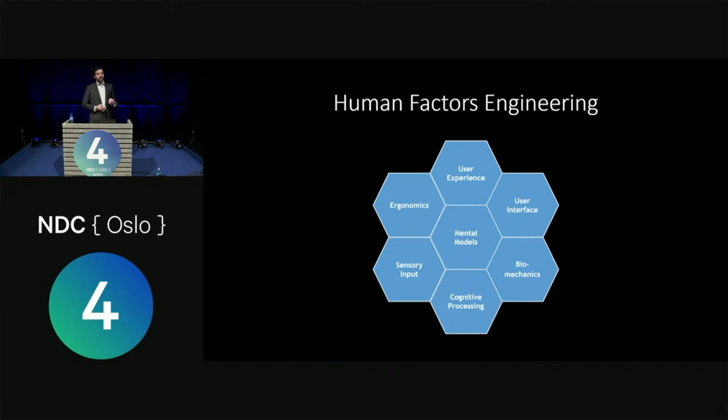Ergonomics, so how human bodies fit into technology and how you build things so that they are comfortable and don't break. And then mental models, which is really how you make sure that what is happening in your user's mind represents what is happening in the system and that they match properly. And all of this together, along with a bunch of other fields, is human factors engineering.

And I want to talk about life-critical systems. And I bring this up because I think probably a large portion of the audience here might be here because planes sound cool, and I want to hear about them and them crashing. But maybe not so aware of how this actually relates to me and what I do in my work.

And so life-critical systems, obviously anything that involves risk to human life or that keeps someone alive or could kill them. And I think a lot more people actually work on these systems than might realize it, perhaps without even knowing about it or without recognizing that it is life-critical.

Because we have aerospace, the hot topic of this talk, and clearly we have avionics and navigation and engines and all the mechanics of an aircraft are all life-critical because if they fail, then down it goes. But also, every other component you might not think about, right?

The timer on the coffee pot in the galley is a life-critical system. It doesn't seem like it, but if that timer fails and the software in it fails or the hardware fails and the coffee boils over and goes down through the floorboards and shorts out some electronics, or if it burns a crew member that is essential for the safe operation of the aircraft, now it's a life-critical system. So there's a lot of things like that you might not consider, but they really are.

We have emergency services, anything with police or fire or medical, clearly life-critical, not just the knowledge and training of the operators, but the technology itself that they're using. Telecommunications is a big one. If your cell phone fails, if the cell network fails, you can't call 911. In a lot of countries, elderly people rely on being able to call in their prescriptions to a pharmacy and have them delivered. Can't do that if your phone doesn't work. All sorts of things fail when communication fails.

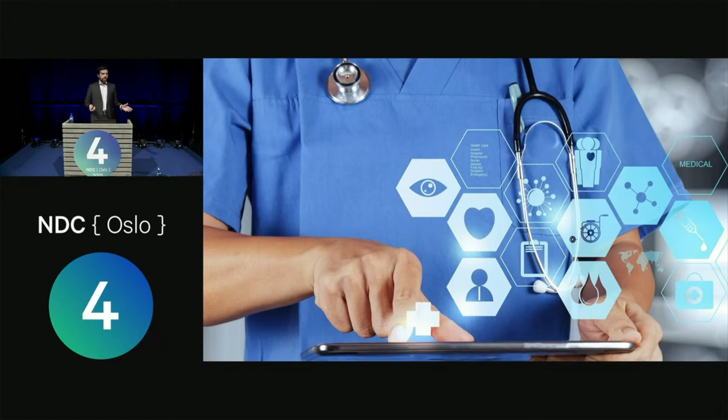And of course, military, anyone who's working in an environment where they're trying to end lives is obviously life critical. And not only is the hardware and software itself intended for that purpose, but also it's being used in environments that are very austere and where it's being abused in ways that it shouldn't be, like smashed and through extreme heat temperature ranges and all sorts of issues that you have to think of. So it really covers a lot of different topics, and that's why I want you to think that this does actually apply to you as well.

And I also want to mention that what we're talking about is not theoretical, right? These events happened, and a lot of people died from them. And while I have some jokes throughout the presentation to try to keep it fun and interesting, I just do ask that we keep in mind that a lot of families suffered from these and that it's a very important topic.

And I also want to mention that we're not assigning blame here. I'm not an accident investigator, so I don't have that legal authority. And while it might sound like I'm blaming a company that starts with Bo and ends with ing, I'm not. So please keep that in mind if you're watching Boeing's lawyers.

So let's talk about what actually happened. So we have two crashes, right? The first one, Lion Air Flight 610 in October of 2018, so just over 3 years ago. Crashed into the Java Sea near Indonesia at least 560 kilometers an hour. That was the last recorded speed that they were able to get from the flight recorder from radar, but it probably was much faster than that by the time it struck, and that killed all 189 passengers and crew on board.

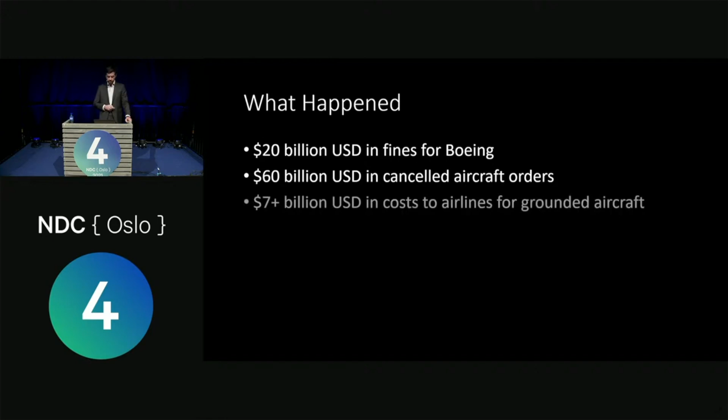Looking at cost-wise: $20 billion in fines for Boeing alone, $60 billion in canceled aircraft orders, so $80 billion is a lot of money to a company even like Boeing. That is a huge chunk of their revenue. At least $7 billion in cost to the airlines for flights not being able to fly and having to maintain and store those aircraft for that long, and $100 million in lost income just for the pilots who weren't allowed to fly because the aircraft they're supposed to fly isn't allowed to fly.

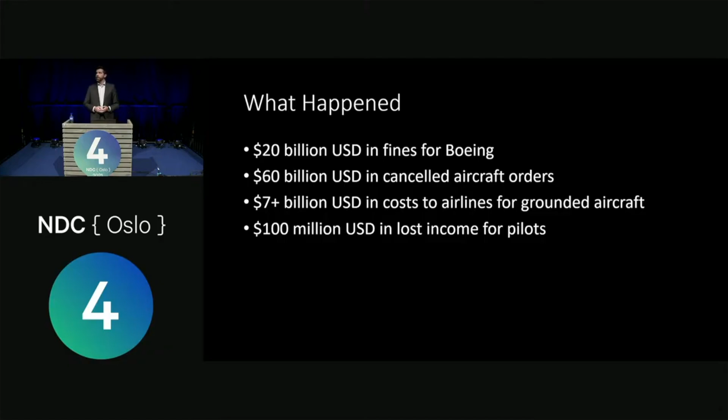So big impacts, really had an effect around the world in the aviation industry. Let's talk about timeline. The Boeing 737 is kind of a legendary aircraft, first released in 1967, so it's been around 54 years. It's ingrained into aviation history.

In 2006, Boeing says, okay, we've gone through three generations of this aircraft already, it's time to replace it, it's getting old, we need a new design. So they plan what they call a clean sheet, meaning a clean piece of paper — you're starting from scratch design for the replacement.

Then in December 2010, Airbus, which is Boeing's main competitor, launches the A320neo. The A320 is an aircraft very similar to the 737 in terms of size, capability, passengers and range, so it's a direct competitor in the same market space. Airbus launches the A320neo, and neo stands for new engine option — they took their existing airframe and put newer, much more efficient engines on it.

This is very popular among the airlines. The neo sets a record of 730 aircraft sold at a single air show, which is the most to date. And the month after, American Airlines orders 260 of these neos.

The really important part here is that it breaks their exclusivity with Boeing — up until this point, they had only operated Boeing aircraft. Now all of a sudden they're saying, we are willing to go through the logistics challenges, the maintenance and training programs and everything to take this new aircraft because it is just that appealing in the market. But they also say to Boeing, okay, we still like your 737, so we want some more, but we need them to have newer and more efficient engines so they can match the A320neo.

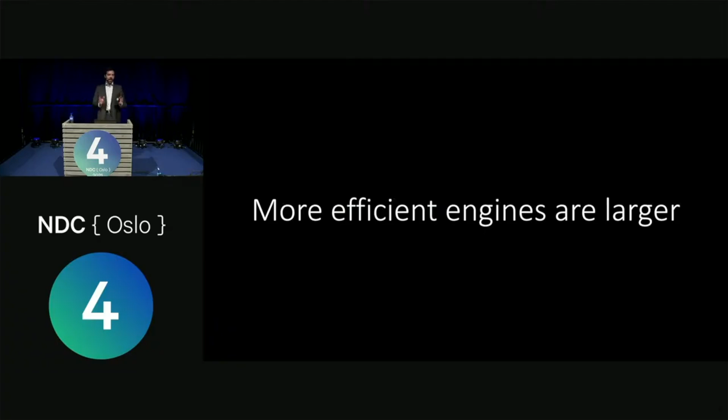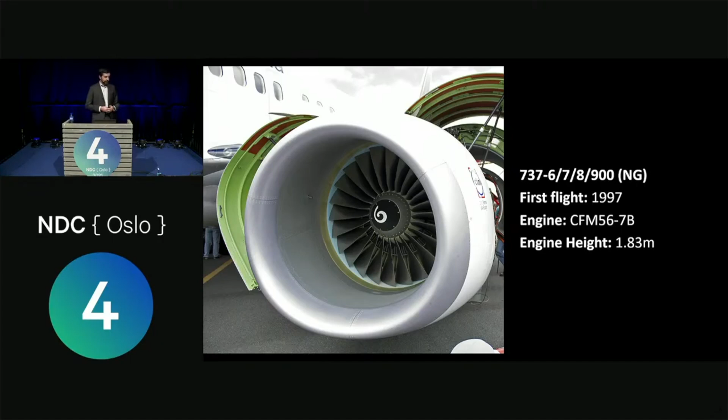Here is the third generation, from 1997, 1.83 meters, substantially larger, and you can see that it's kind of moved forward and up on the wing. And here's the 737 MAX, 2.26 meters, much larger.

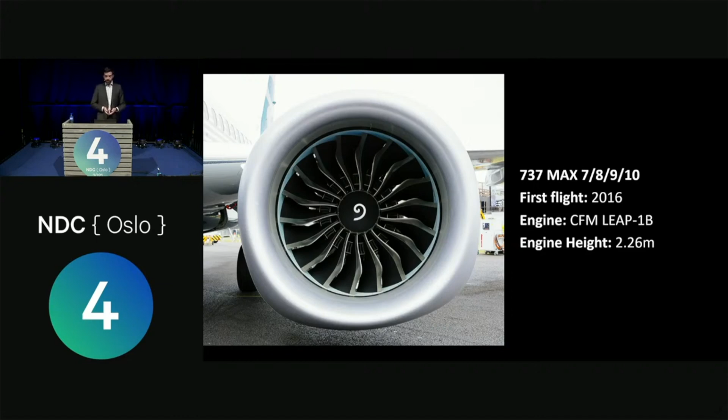Now the question becomes, how do you fit an engine that is twice the diameter of the original engine on the same airframe? Well, you don't, is the answer. You can't really do it, but you can kind of fudge it around so that you can squeeze it in there somehow. So what they did — here's a schematic that shows a better view.

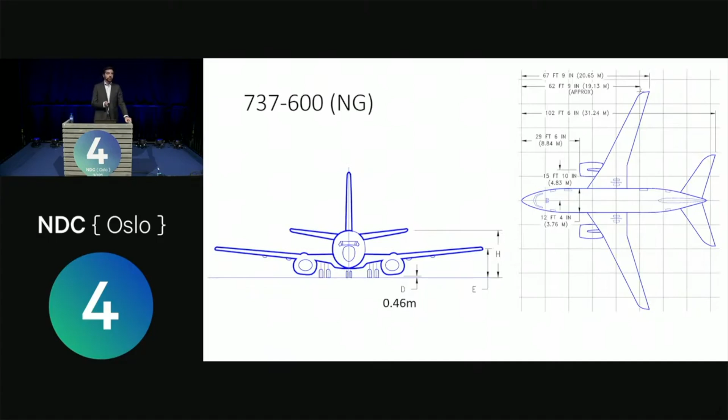This is the original — you can see the engines are directly under the wing. Here's the third generation — you see they moved the engines forward on the wing so they could raise them up in front of the wing, which helps with the ground clearance. And here's the MAX — you can see they really took that concept to the extreme.

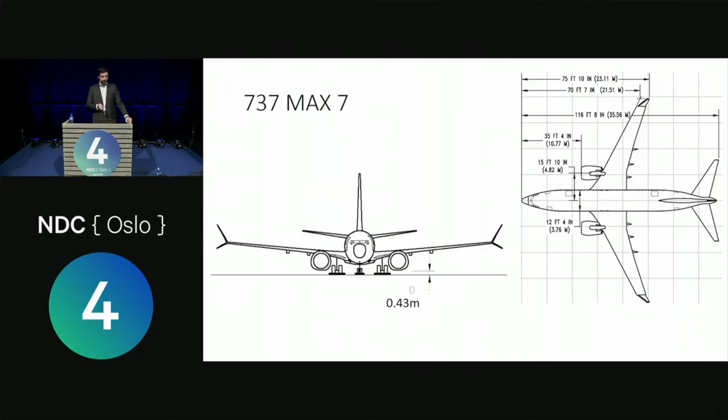And if you look at the top-down view, those engines are so far forward, they're basically hanging off the front of the wing. And even after doing that, you still have a very small ground clearance of 43 centimeters. From a side view, you can see the same thing, just a better impression of how far forward those engines on the bottom are mounted.

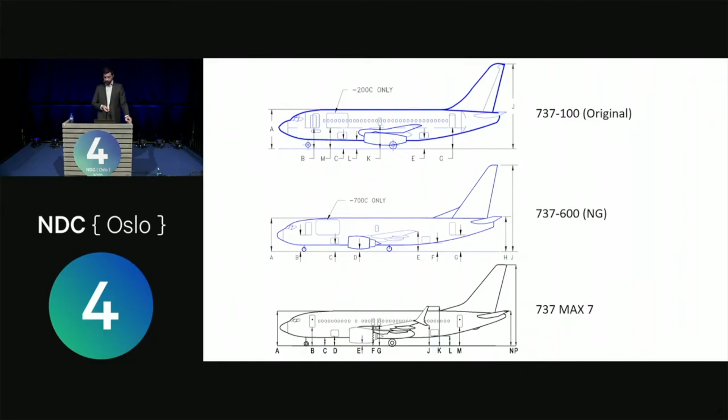So why is this a problem? Why does it matter? Well, the nacelles, the casings that hold the engines, are actually what we call lifting bodies. They generate lift when air moves past them. They're basically an extension of the wing in that sense. And the problem is that when you have something that generates lift that's moved forward on the aircraft, now the front of your aircraft wants to go up, and this causes your aircraft to pitch up.

This issue presented itself primarily when the aircraft was at what we call high angle of attack. Angle of attack is a word you're going to hear a lot, and it means the angle of the aircraft relative to the air that it is moving through. It's similar to pitch related, but not exactly the same, because it also depends on the direction of the air. So when the aircraft's at a high angle of attack, this issue becomes more pronounced, and your aircraft pitches up, which causes lift at the front, making it want to pitch up more. You have this reinforcing loop that is not good.

And the FAA says, no, this is not okay, you can't have an aircraft that wants to pitch up on its own without any pilot input. Boeing's own test pilots say the same thing. They say, we've been flying this, it feels off, it's not handling the same as the old 737s, it feels unstable, and this is a problem.

So Boeing tries a couple different things, and they try to modify some aerodynamics to handle this problem, but due to the age of the airframe, and the fact they can't really change it that much without redesigning the whole thing, they can't do it. So they decide to try to fix this hardware problem in software, and we get what we call MCAS, the Maneuvering Characteristics Augmentation System.

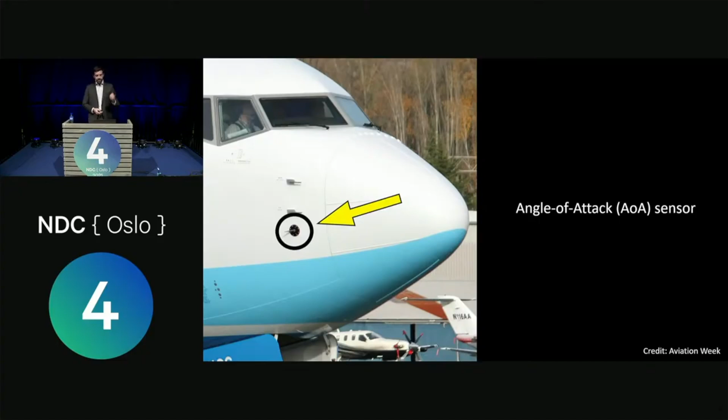MCAS is an algorithm, a piece of software that sits and operates in the flight computer. Here, there's a sensor on each side of the nose of the aircraft. This is the angle of attack sensor, and it measures the angle of the aircraft relative to the flow of air it's moving through. This sensor is connected to the flight computer where the MCAS algorithm is located.

The way it works is that this sensor determines when the angle of attack is too high, and when it does, it gives that information to MCAS, which computes that and says, okay, our angle of attack is too high, we need to activate this system to bring the nose down. What it does is it rotates the horizontal stabilizer, which is this black line in the tail of the plane with the circular red arrow. It rotates it back, and that generates lift at the back of the aircraft, which brings the nose down and tries to keep it stable.

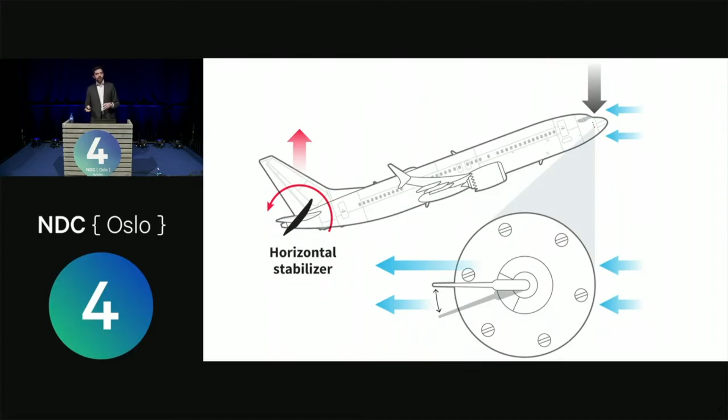So we have this nice closed loop system. It checks it, makes a compensation, checks it again, and keeps going, making sure the aircraft remains stable. This is great, this deals with the problem of too much lift at the front of the aircraft causing it to continuously pitch up.

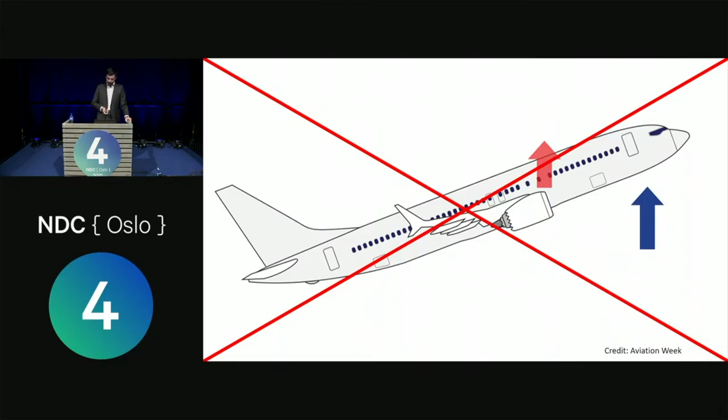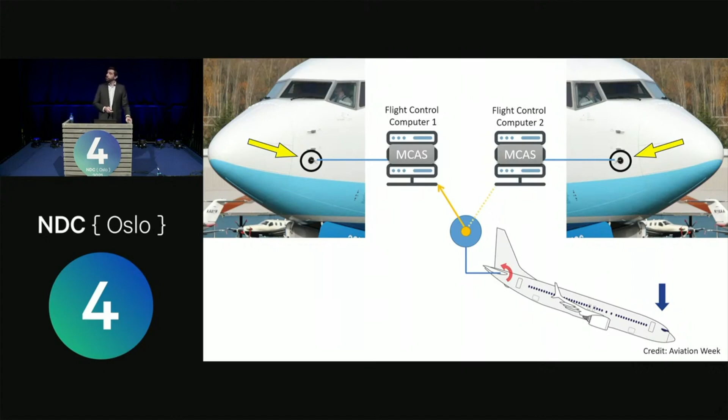I want to take a little break to talk about something called type ratings, because they're very important in what happened here.

So a type is basically a category of aircraft that have similar characteristics, and a type rating is what allows a pilot to fly any of the aircraft within that type.

And type ratings are hard to get. They take a lot of time and money. Your pilot has to go through many hours in ground school in a classroom. They have to do simulator training, an oral exam, a check ride, and it's a long and intensive process, and airlines don't like this.

They don't want their pilots to have to do this if it's not necessary, not only because this equipment is very expensive, the simulators are many millions of dollars, but also because every hour a pilot spends training for a new type rating is an hour they're not flying for the airline, and therefore the airline isn't generating any revenue. So it's a very expensive process.

So they try to avoid this at all costs if they can, which is why you'll find that airlines generally focus on a few different types and try to keep it restricted in the number that they have.

And then we have what are called variants. So the Airbus A330 is a type, and within it are several different variants. They're similar aircraft, slightly different sizes, slightly different characteristics, but for the most part they're the same. And the A320 is also a type with several different variants.

If we look at a picture of the cockpits here, the A319 and the A321 are both variants within the A320 type, and we see why they're kind of treated the same way. The cockpits are almost identical. Similar displays, controls, everything, flight handling characteristics are all very similar.

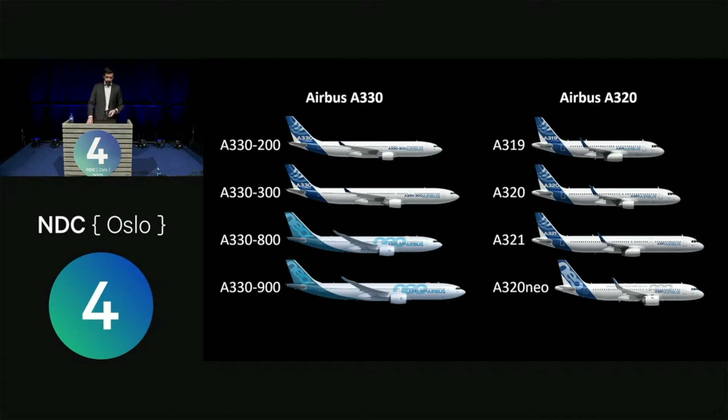What's important to note is that the A320neo, this new aircraft that made Boeing so worried about market share, was given the same type rating as the old A320s, which meant all the airlines that had these old 320s could immediately have their pilots fly the A320neo with minimal training. This is a huge factor in making it competitive in the market.

Now the 737, also a type, and all three previous generations of it were that same type. So Boeing says, okay, well, nuts. If Airbus was able to do this with the A320neo, we're not going to be able to compete unless we do the same thing, so our new 737 MAX has to be in the same type as a variant.

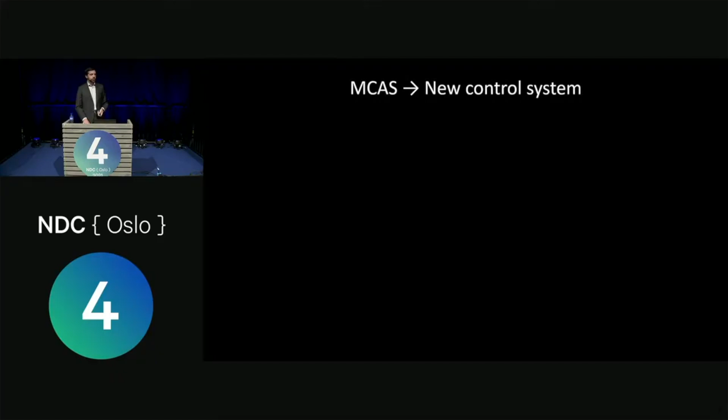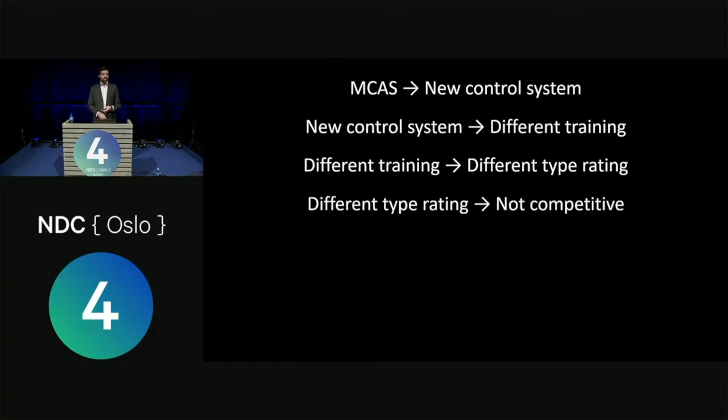But the problem with this is that MCAS is a new control system. And a new control system means it requires different training, and different training means it has a different type rating, or gets assigned a different type rating. And a different type rating means it's no longer competitive, and this makes Boeing extremely sad, because they cannot compete in the market, and they will lose all of their market share to Airbus.

So Boeing comes up with a solution, a great solution. They say, well, the problem is it's MCAS that requires the training, so what we're going to do is we're just not going to tell anyone about MCAS. Because if you don't know about MCAS, you obviously don't need to be trained on it.

And if you don't need training, you get the same type rating as the older models, and if it's the same type rating, then you now have a competitive aircraft again, and this makes Boeing extremely happy. Because now they've achieved their goals, they've gotten something to market pretty quickly that is competitive with the A320neo, and there are no major roadblocks, all the boxes are checked, we're good to go.

And this is something that Boeing recognized. So, before I go on, I want to mention that you're going to see a bunch of quotes here throughout the rest of the presentation from a newspaper called the Seattle Times. As you may know, Boeing's major manufacturing facilities have historically been located around Seattle, Washington, in the US.

The Seattle Times has a long and colorful history of covering Boeing aircraft, and have done an excellent job of it for the most part. They actually won a Pulitzer Prize for their coverage of the previous generation of the 737. So that's why we use them as a reputable source.

So Boeing decided that the pilots needed no extra training on the system, don't even need to know about it, not mentioned in the flight manuals. That was done to earn a common type rating with the existing models so they could minimize the training of the pilots.

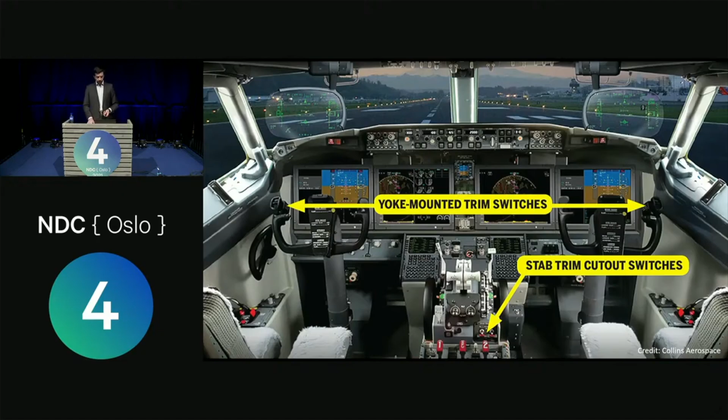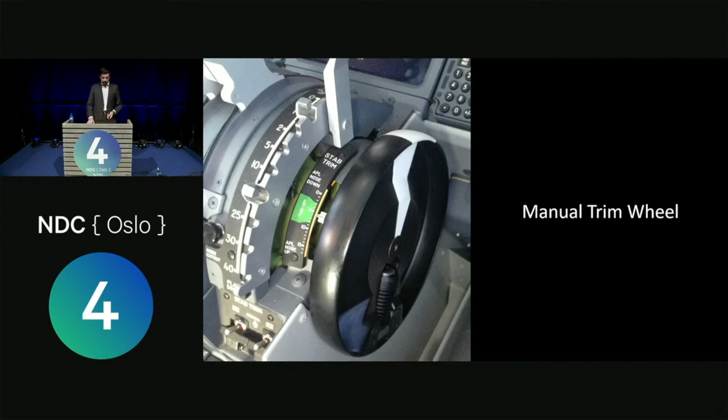So it's difficult to determine these events, and a lot of these events that we're talking about are based off of best estimates of what happened, but there's no guarantee that it's necessarily correct.

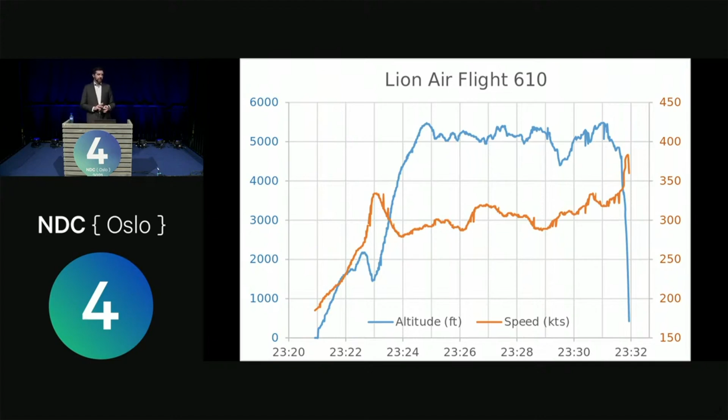So after this crash, the FAA and Boeing get together and say, what could have happened? And I think at this point, internally, they're aware of the issue, but they still don't make it public. But they release what's called an airworthiness directive, which is basically a bulletin that goes out to every airline and pilot that operates this aircraft to tell them of something important about it. So they're required to read it and understand it.

So they're just saying that in the event that this starts to trim down, try first to disable the autopilot in case that's the issue. If it still happens, disable the automatic trim in case that's the issue. And if it still happens, try to control it manually.

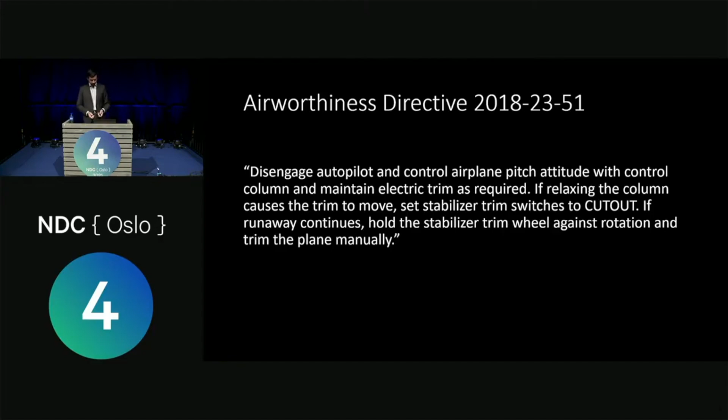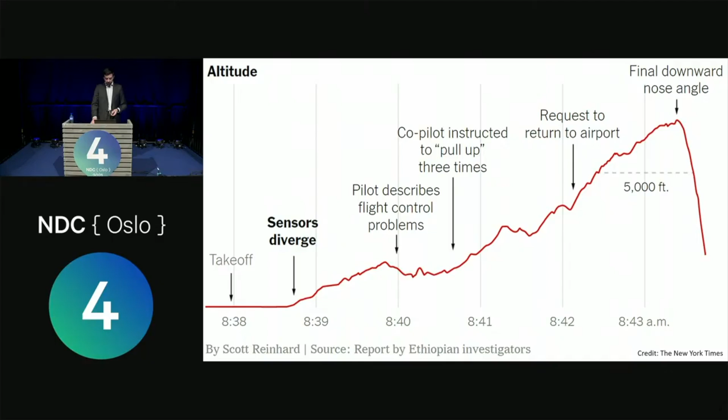So what happened on this one? Well, same issue. This time they think it was a bird that struck the sensor during takeoff and broke it. But it did the same thing—it sent a maxed out value and said, very high angle of attack. MCAS activates, nose of the plane goes down, same issue. But this time those pilots have read that airworthiness directive.

So they're aware that this can be a problem. They're aware of what they're supposed to do. So what they do is they flip those cutout switches to deactivate the electric trim, and they try to use their manual wheel to rotate the stabilizer.

But here's a problem: during takeoff, a pilot has the aircraft at full throttle, and it's one of the only times during regular flight that you're actually at full throttle. Because this issue occurred shortly after takeoff, the pilots got distracted and forgot to throttle back the engines. So this aircraft was flying at full throttle for quite a while and had reached a very high speed relative to where it was in the flight and the altitude.

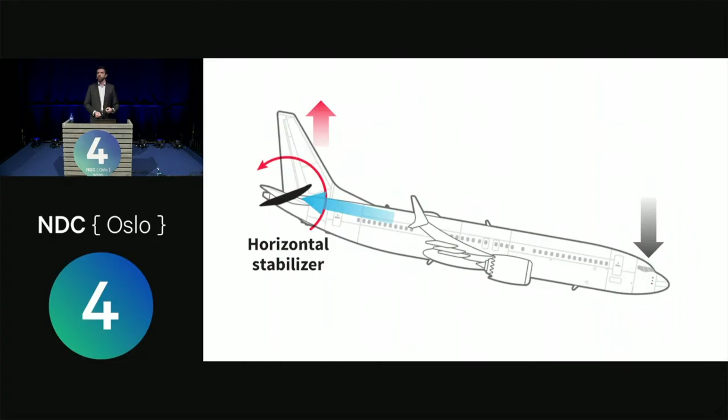And what happens when you're moving very fast through the air and your control surface is already tilted back, as it is in this image, is that there's a lot of air moving against that surface—a lot of force pushing against it. Trying to counteract that force with a little wheel next to your knee is extremely difficult. So these pilots simply couldn't do it; they could not apply enough strength to rotate that stabilizer. So they recognized that, and said, okay, the only way we're actually going to be able to move the stabilizer is to use the electric motor.

But to do that, we have to re-enable those cutout switches and then use our little electric trim toggle switches again. Problem being that this whole time, MCAS was still running in the background. It just couldn't do anything because they disabled the linkage between them. But as soon as they re-enable it to try to use the trim switches, MCAS has an effect again.

Now, to recap the events, Boeing modified an existing design, which changed the aerodynamics. They couldn't solve it without a redesign, so they solved it in software. They didn't tell the pilots or airlines about it, so they wouldn't have to be trained on it. Pilots don't know what's happening, and that gives us accident number one.

They provide the airworthiness directive to tell the pilots that there could be an issue. They still don't say what the issue is or what this algorithm is that's causing problems, but they say just be aware there could be a bug in the system. But the pilots are not physically able to follow the instructions due to other issues, and we have accident number two.

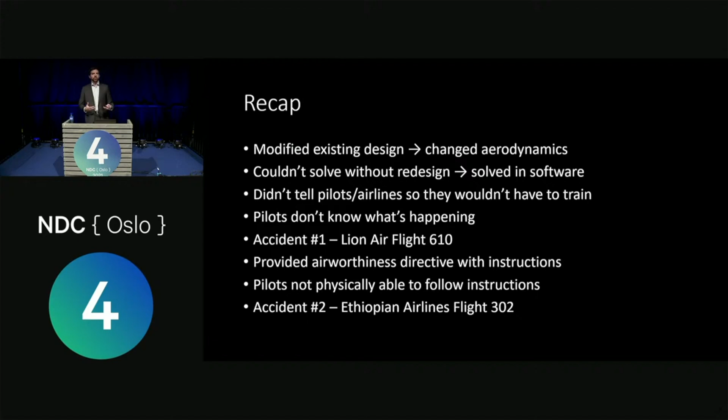So this covers the events, right? This is the story of what happened with these planes and why and how they crashed. And now we're going to take this and ask some questions about what does that mean for us as engineers and developers? What do we need to think about from this?

What are our takeaways? And the first question I want to ask is, when do you teach users about the inner workings of a complex system? Not just aviation, but any complex, high-performance, or life-critical system. Obviously, the question here is, should those pilots have been told about MCAS right from the start?

So to illustrate this issue, I want to use an example. Let's say we have a generic car, okay, a new model, but there's a factory defect, and with a low probability, there can be this issue where it just accelerates uncontrollably by itself. It just keeps driving and accelerating.

And you have two different ways to deal with this. Deep inside the technical manual for this vehicle, you see option number 1, the correct option. And that says that you need to hold the accelerator pedal at its maximum point for 4 seconds while simultaneously pumping the brakes 3 times at 1-second intervals. You have to apply the emergency brake at 33% and hold it, release it after 8 seconds. And then after releasing the accelerator, but before releasing the emergency brake, you have to activate the 4-way hazard flashers.

Ridiculous example, but if you've ever seen a pilot's checklist for certain issues that happen in flight, it gets pretty extreme.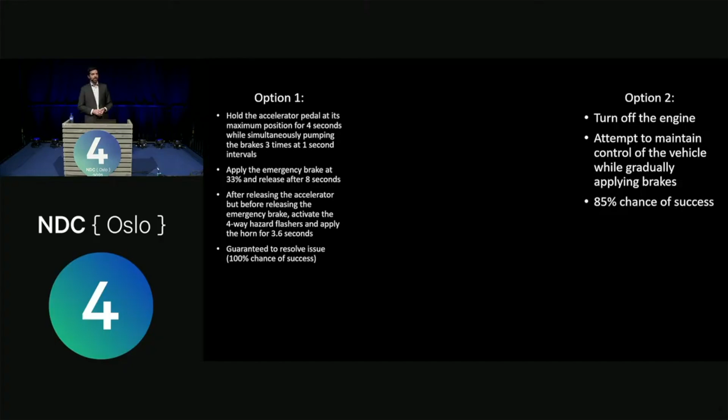Now, the good thing is this is guaranteed to resolve your issue. 100% chance of success if you do it right. If you recognize the issue and you apply the procedure correctly, it will solve your problem. And then you have option 2, which is turn off your engine and attempt to maintain control of the vehicle while you apply the brakes. And there's an 85% chance of success. You might go off a cliff, but you'll probably be fine.

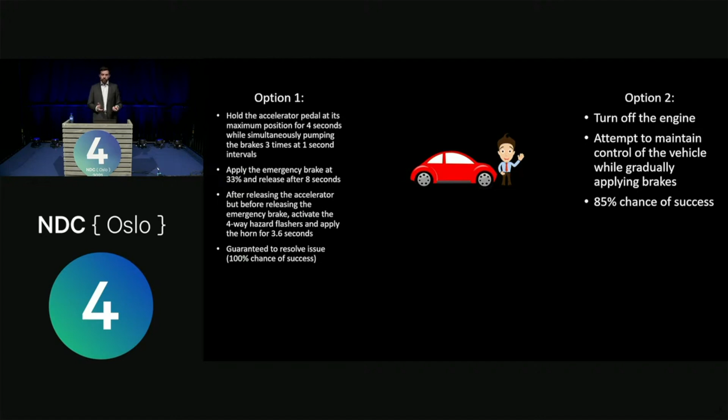Now, say we have 2 users, right? We have your average Joe, and he goes to the dealership and says, I want a new car. And the dealer says, this is a great car for you, but just so you know, it has a small little bug. And what should that dealer tell Joe about how to deal with this bug if it comes up? The dealer has maybe 10 minutes to tell Joe about it, and then Joe's off on his way to drive this car for the next 10 years. Which option does the dealer tell Joe?

Then we have Speedy Sally here. She's an F1 race car driver. And she spends her entire career training on these things, right? She spends 4 hours a day studying, preparing, practicing, the other 4 hours a day driving. And she's able to learn whatever you tell her if you give her enough time to memorize it and practice it. How do you assign these 2 different options to these users?

And I would say that normally you'd do something like this, right? Joe, you're going to tell him about it, and then if this issue occurs 3 or 4 years down the road, there isn't a chance in hell that he's going to actually remember that procedure and how to apply it, and then actually be able to do it under a stressful situation, right? Whereas Sally can probably do it because that's exactly what she's trained for the last 4 years.

This gives the idea that you don't necessarily want to train someone on what is the best option. You want to train them on what is best for them in their system. For Joe, an 85% chance of success is great because he doesn't have to memorize anything—it's just the intuitive thing to do if his car starts accelerating like that. Whereas Sally, since she can memorize it and has the ability to do so, we give her the procedure that is guaranteed to save her life.

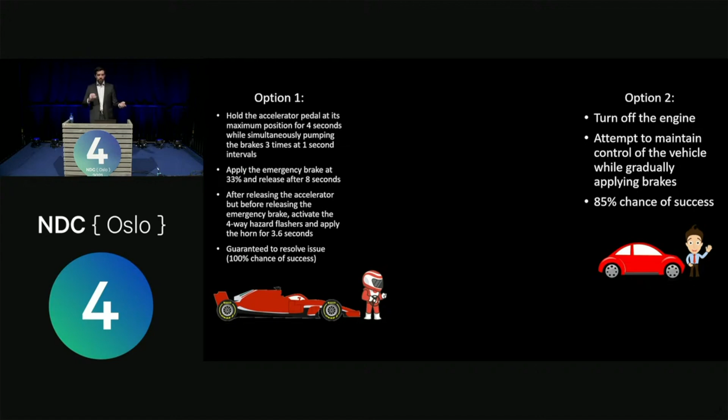These form two endpoints on what I call a performance versus knowledge curve. On the x-axis we have performance or complexity, since those often go hand in hand. And on the y-axis we have the knowledge required to operate and maintain a system. Sticking with our theme of transportation, let's plot some modes of transportation.

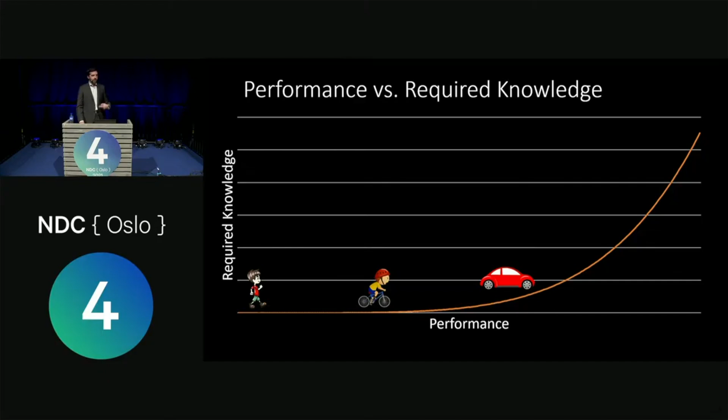We have walking—very low performance, low level of knowledge required to do it. Cycling's a bit higher, and then driving your car you're getting into quite a bit of performance, but you actually have to train and memorize some things. You have to do your driver's test and training and all that. And then we have our F1 car up at the top.

And it's not just cars—aircraft fit the same model. You have your little Cessna down at the bottom, your beginner airplane that anyone can learn to fly with a little bit of practice. Then you have your commercial airliner, a big step up in both performance and knowledge. And then you have your fighter jets up near the top, where you spend most of your time training and just a little bit of time flying.

This applies not just to transportation but to all sorts of things. Let's consider a CPU. You have your stock 2.8 gigahertz quad-core CPU in your laptop that my grandmother can operate without a problem. All she needs to know is if it fails, you turn it off and back on again, and it'll probably work. Versus your overclocked CPU...

In order to do that, I need to understand how that works. I need to know the methods required to achieve that. I need to know how to maintain it. I need to know about thermal issues and how to resolve them if there's a problem. Much higher performance, but a much higher level of knowledge required to do it.

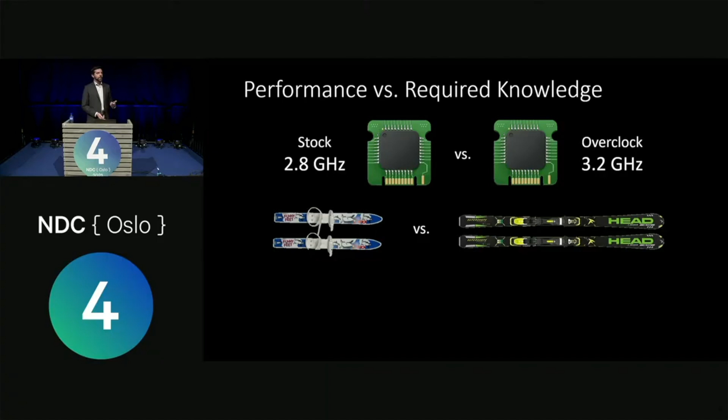We have our little kiddie skis—strap them on and go down the bunny hill, not a big deal. Versus your powder skis, where you've got to know not only how to ski, but also your boots, how to do the bindings, how to tension them properly, and what to do if there's a problem.

And similarly, you have your MacBooks versus your Linux computers, where you have a much higher performance for a higher level of knowledge. I get very different reactions to that joke based on whether it's a front-end developer conference or a more server-side conference, so I wasn't sure how it would go.

So we put these on our graph, and we see that the trend holds. It's really consistent across most different things in life that you might build.

Now, the question is: should the pilots have been told about MCAS? Coming back to that—I don't know. On one hand, yes, these are experts who are operating a complex system, who can train on it, who have the time to learn and memorize procedures, and who know how to deal with these types of issues, so maybe you should tell them. On the other hand, a commercial airliner is an extraordinarily complex piece of machinery with so many different subsystems and components that could fail that there's no possible way for one person to memorize all of it. So should they have been told? Maybe.

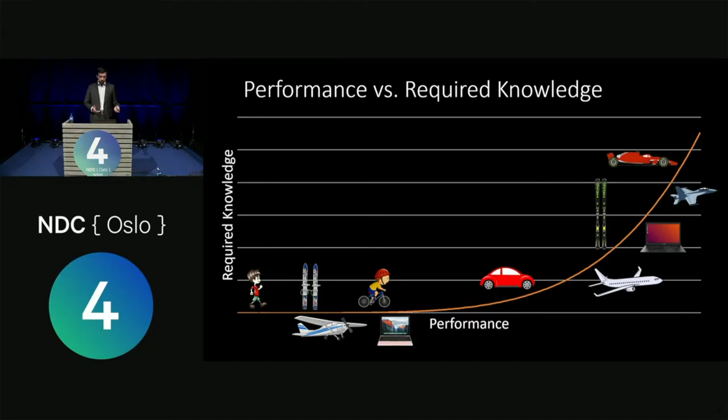Well, let's look at what actually happened. Boeing concluded that there would be little risk in the event of an MCAS failure, in part because of an FAA-approved assumption that the pilot would respond to the issue in a mere 3 seconds. So they're saying it's okay if it fails, because the pilot will recognize it, disable it, take over manually, and it will all be fine.

But then they said, we're not going to inform the pilots about MCAS in the manuals, even though Boeing safety analysis expected the pilots to be the primary backstop in the event that the system went haywire. So they said, it's okay if it breaks, pilots will take over, they'll fix it, but we're not going to tell the pilots about it. Again, I'm not assigning blame with this, but I think we can see why this is a major issue, not necessarily in the design of the aircraft, but in the way it was handled and presented to the pilots in terms of training and materials and knowledge.

So our second question then is, how do you ensure that users know what is happening? In this case, we assume we tell the pilots about MCAS, they're aware of it, they know it's a system that can break. If it does break or has a failure, how do we make sure the pilot is aware of that? This brings us to something in human factors called mode confusion, which is a very hot topic. It applies to any complex system where a human is operating it, particularly an aircraft. It's been cited as a factor in, I'd say, probably the majority of aircraft crashes in the last 50 years, so it's a very important topic.

Now, in an aircraft, you have a lot of different modes it can be operating in. You have an autopilot mode and an auto throttle mode, and those aren't necessarily the same thing. You have a takeoff configuration, a landing configuration, and a dozen different modes and configurations the aircraft can be operating in. In these different modes, sometimes the same controls, switches, and displays do different things depending on what mode it's in. So if you're not fully aware of what the system is doing at any given time, you might not know why it's happening or how to deal with it.

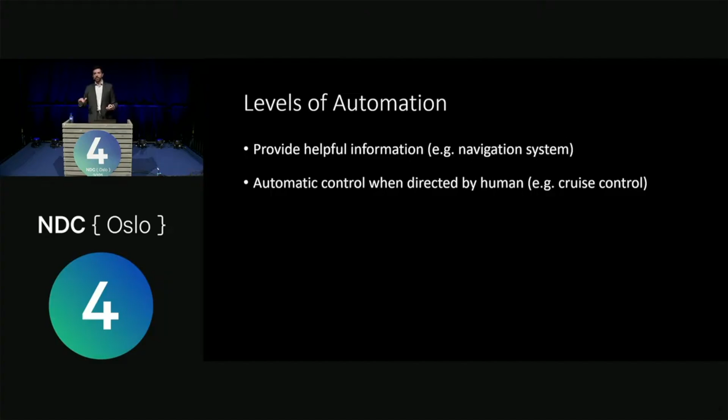It helps you do what you're trying to do, but it doesn't actually control anything. Then we have automatic control when directed by a human. This is more like your cruise control, right? It turns on when you turn it on, it automates until you turn it off, and that's all there is to it. It doesn't do anything on its own unless you tell it to.

Level 3, you have automatic control unless directed by a human. It's more like your Windows Update, right? If you don't do anything to intervene, it will update, it will restart your computer, and off it goes on its own unless you intervene to stop it.

And then level 4 is your automatic control with no human override. This one's kind of hard to think of an example for because there are relatively few systems in the world where there isn't some sort of big red emergency stop button to shut it down. But you see this more in super complex technical pieces of equipment or things where there's very high latency, like spacecraft. I'm not sure if you remember New Horizons going by Pluto and taking those photos. That entire procedure was choreographed and automated, and there was no way that a human could stop it once that program was sent. So that's kind of an example of how that works there.

So where does MCAS fit in this? Obviously, it's not level 2 because it occurs without a human doing anything. Is it level 3 or 4? Well, there is a manual override, so we'd say 3, but you cannot enable your manual override without also disabling a lot of other important systems.

In this case, they could not disable MCAS without also disabling the electric trim motor that they would need to rotate the stabilizer back into position. So is it really a manual override if it breaks a bunch of other things in your system? I don't know. I'd say it probably is not.

And these are things that, I'm not saying you should or should not choose one of these levels of automation for your systems you're designing. I'm saying this is something you choose in advance going in with very careful planning, because you don't want to be dealing with these issues down the road after you've designed your system and you start inserting things that fall in different levels of automation and mess with your safety analysis.

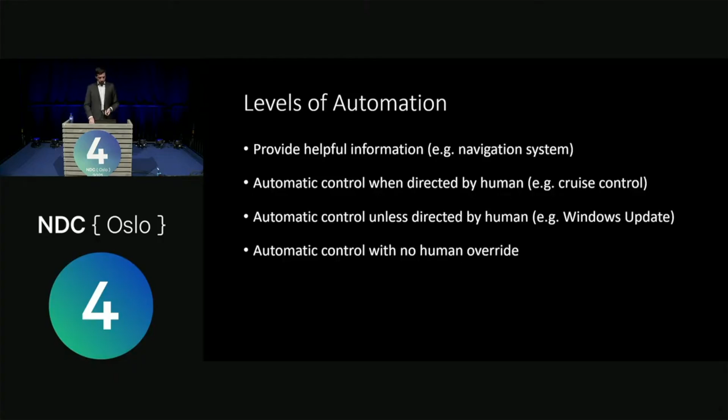So let's talk about redundancy. Now, this is further away from human factors and human involvement, but we've spent all this time talking about the planes and their designs, so it's good to touch on.

Hopefully, in our diagram, most people can see the flaw in terms of redundancy. The two flight control computers are redundant, and they're there for that exact reason. I believe they're actually built with different components, different architectures, different software, by different manufacturers, to make sure that if there's a bug in one, hopefully it won't be replicated in the other, and you could switch from one to the other to resolve the issue. But each one is only connected to one sensor, and if that sensor fails, the computer does not realize that and therefore has no way to know that it should switch to the backup computer. It can only be done manually.

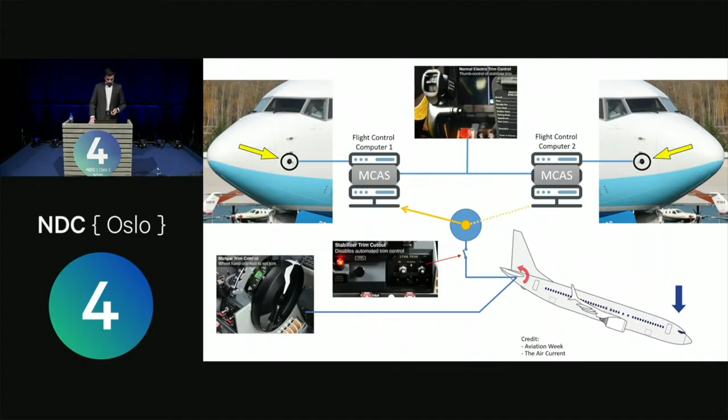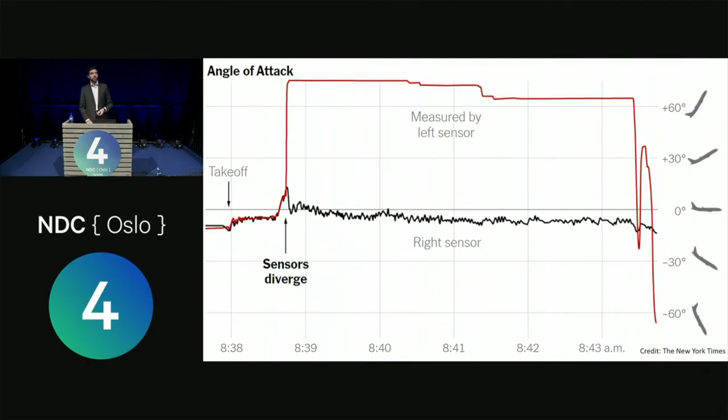This is a diagram showing the readings from the two sensors on that aircraft, the two angle of attack sensors, during the crash. The issue is pretty obvious: the sensor on the left broke early on and maxed out its readings. The sensor on the right was working fine, but the sensor on the left was the one connected to the active flight computer, and therefore the one the aircraft was using for its control inputs.

So talking about redundancy, what does that mean? Well, first off, please don't ever let a critical system have a single point of failure. Anyone here who does DevOps, infrastructure, high availability work like that, hopefully is already thinking about that and incorporating it into your practices, thinking about multi-regional architectures, active-active failovers, etc. Very important when you're talking about life-critical systems in particular.

Second, don't let one broken sensor affect good sensors. Because what happens if the two sensors disagree? In the graph I just showed you, some systems might say, okay, we're going to average our two sensors and we'll probably get an accurate reading. Well, in this case, clearly that wouldn't have worked either, so it would have been very erroneous data. So what do you do? Ideally, you add another sensor to do some sort of voting mechanism. This is how a lot of distributed systems work that you might be familiar with. I think Apache Zookeeper uses a similar system to make decisions. You can try to eliminate the one that disagrees with the other two, and hopefully at least 2 out of 3 will be valid.

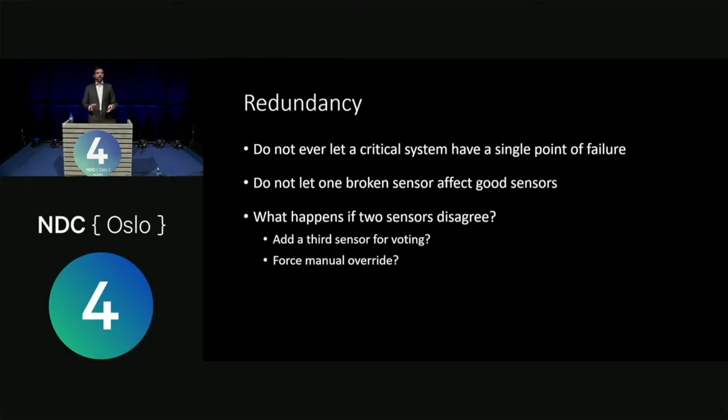Alternatively, another approach is to force a manual override. So if you can detect that your sensor is giving erroneous data, maybe you can say, all right, I can't trust this data, I don't know what I'm supposed to do, so I'm just going to deactivate the automation and let the pilot, the human operator of whatever system, take over. But imagine you're flying your plane and focusing on something else, like your checklists or navigation, and all of a sudden your autopilot deactivates for this reason or any other, doesn't notify you, and your plane just starts drifting off to the side, and you have no idea why it did that, why it deactivated, what the problem is. And now you get into mode confusion, which we talked about earlier.

You see that these issues are often connected in this web of messy problems that are very difficult to solve when you're trying to design. Again, I don't have an easy answer for you on how to do it. Adding more sensors for voting costs more money, there's more parts that can break, and trying to average data doesn't work. There's no easy solution, but you have to think about what's going to be most relevant to your design during the design phase.

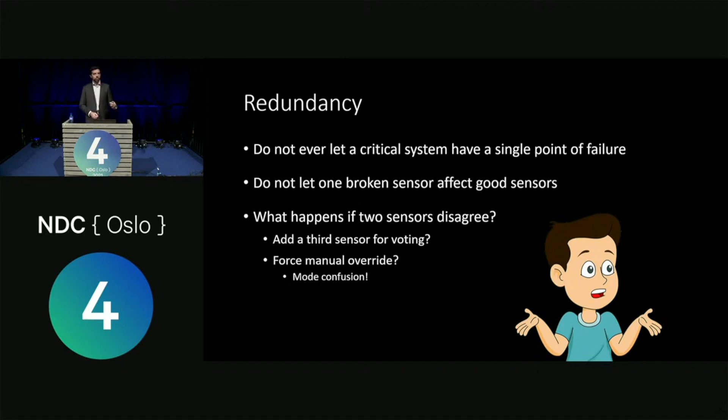And let's talk about change management. This is a big one. Again, not necessarily related to human factors—I guess if you're considering the developers as the humans, then yes, that is human factors, but not the pilots.

With MCAS specifically, this is interesting because the original version was activated only if 2 distinct sensors indicated an extreme maneuver, requiring both a high angle of attack and a high G-force to trigger the algorithm. In the initial design, it was meant as a backup in case the plane got out of its flight envelope and pitched up at a high angle of attack, a safety measure to cover for that.

But during flight testing, the test pilots said, wait, we love this. This is a great feature. It makes it feel more like the older 737s. It makes it feel more stable. Give us more MCAS. And so Boeing said, okay, we will do that.

They decided to extend the range of when that system would operate into the takeoff phase, because during takeoff you're naturally at a very high angle of attack since you're trying to get off the ground, and this problem is likely to occur where you have too much lift in the front of the aircraft.

So they said, okay, we're going to use MCAS for takeoff, but the problem is that at takeoff you're moving pretty slow, so there's no excessive G-force. What they had to do is remove the G-force sensor as a trigger, because otherwise it wouldn't have worked for takeoff. But that meant MCAS is now activated by the single angle of attack sensor, reducing it down to a single point of failure.